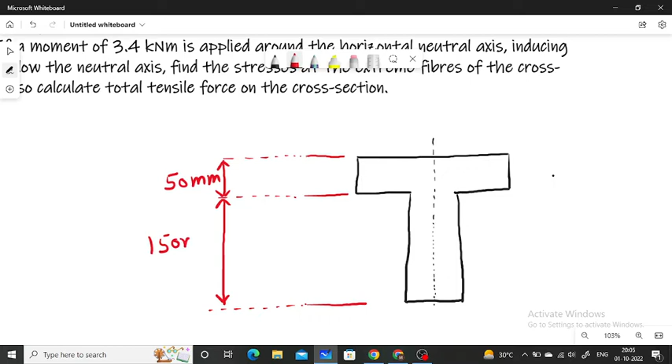The dimension of the plank is 50 mm.

Now come to the problem. Two wooden planks 150 mm and 50 mm each are connected to form a T section of a beam. If a moment of 3.4 kilonewton meter is applied around the horizontal neutral axis, inducing tension below the neutral axis.

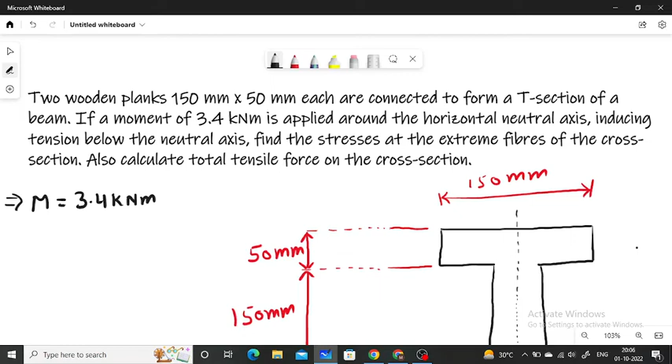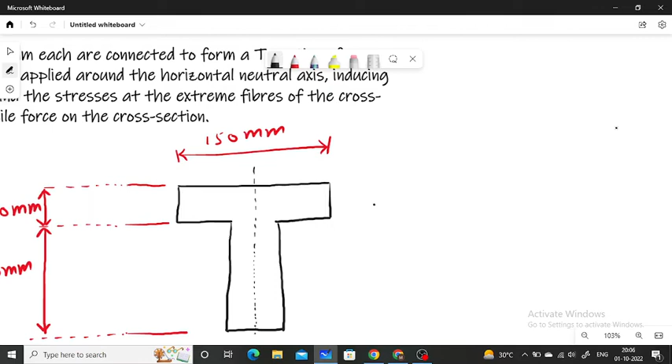यहाँ क्वेश्चन में ये कह रहे हैं कि ये जो बीम है, सपोज ये मेरे पास जो बीम है, इस बीम में न्यूट्रल एक्सिस के नीचे की लेयर्स पर टेंसाइल स्ट्रेसेस हैं, टेंसाइल बेंडिंग स्ट्रेसेस हैं। ओके, ये किस केसेस में टेंसाइल स्ट्रेसेस न्यूट्रल एक्सिस के बिलो अप्लाइड होती है? बिलो द न्यूट्रल एक्सिस टेंसाइल स्ट्रेसेस तभी इंड्यूस्ड होंगे जब बीम में सैगिंग प्रोड्यूस होगी। ओके, सैगिंग लाइक दिस।

The length of the bottom layer will increase only if sagging develops due to the applied bending moment or due to the applied load. So here in this T section, sagging will develop below the neutral axis, and tensile stresses are induced due to the load conditions.

First of all we have to determine the position of the neutral axis. As we discussed in the derivation of the bending moment, the neutral axis passes from the center of gravity, the center of area of the section of the beam. So first of all we have to calculate the center of area of this T section.

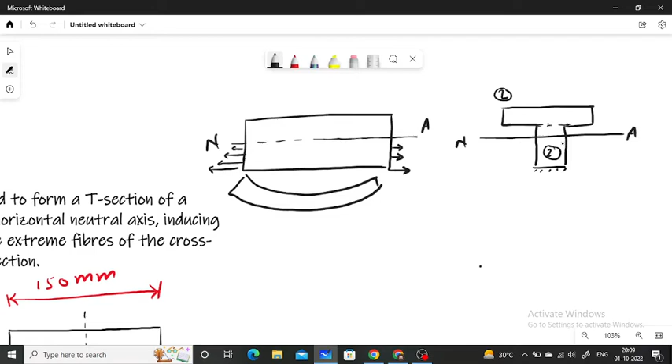Now for finding out the center of area of this cross section, we have to divide this section into two parts. First, a horizontal rectangular section, let's call this section 2, and a vertical rectangular section, let's call this section 1. So first of all we have to calculate the center of area of this cross section.

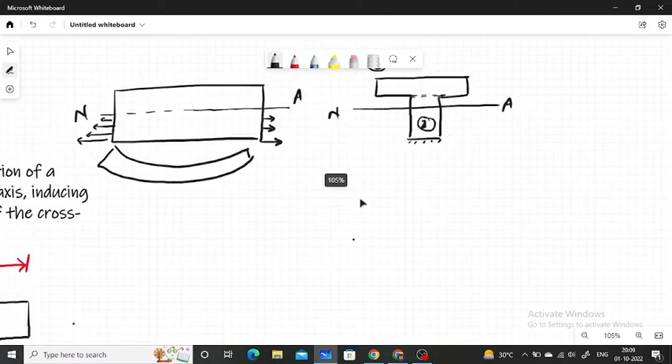As we know, the bending equation for the beam is M upon I equals sigma b upon y, where M is the maximum bending moment of resistance applied on the cross section of the beam, and I is the moment of inertia of the cross section about its neutral axis. For rectangular cross sections, the moment of inertia about its neutral axis is bd cube by 12.

But for this T section, we have to calculate the moment of inertia using the parallel axis theorem. And we know that sigma b is the bending stress developed on a layer which is at a distance y from the neutral axis.

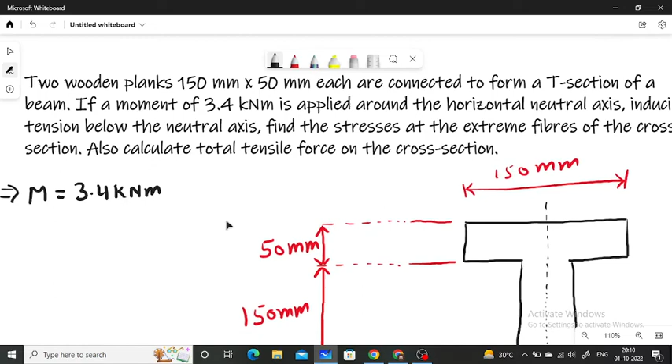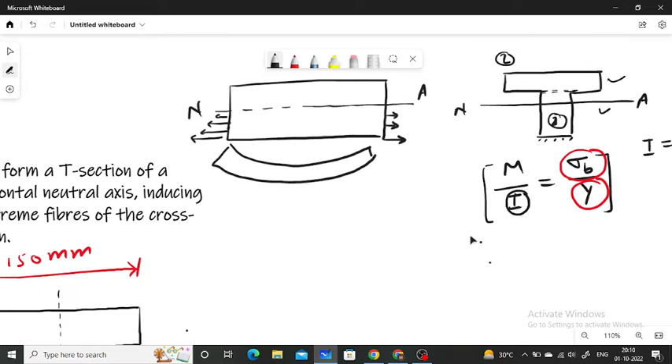Now for determining the bending stresses, the problem says to find the stresses at the extreme fibers of the cross section. So to find the magnitude of stresses at its extreme fibers, we have to calculate the center of area of this cross section, because after finding the position of the neutral axis, we can calculate the distances of the extreme fiber from the neutral axis.

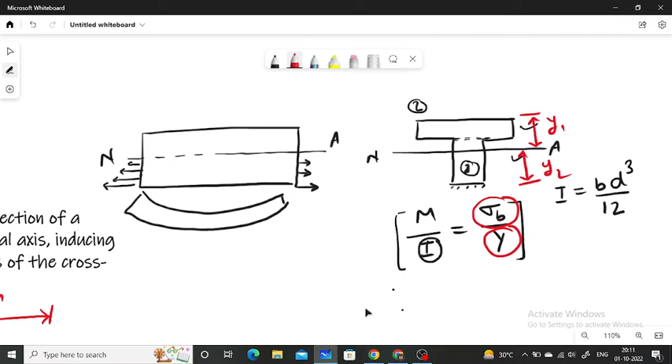Here the neutral axis will not pass through its middle point, so the distances of the upper and bottom extreme fibers from the neutral axis are different. So we have to calculate these distances. First we have to calculate the position of the neutral axis, so that we can determine the distances of the extreme fibers from it, and then calculate the maximum bending stress induced in the section.

Now for calculating the center of area of this T section, we know that this cross section is symmetrical about the y-axis.

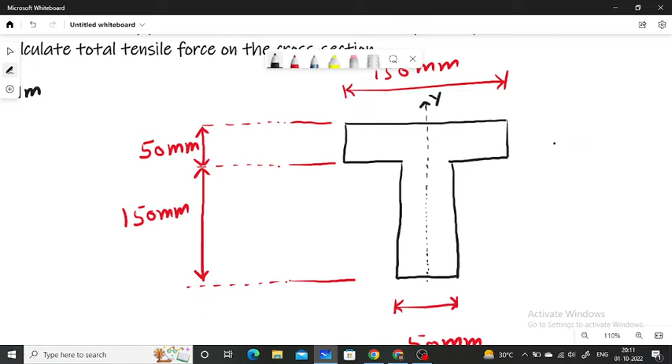If we draw a vertical axis from its center point, then about this axis, the section is symmetrical.

Now draw a horizontal line from its bottom layer, the x-axis. The section is not symmetrical about the x-axis, so we have to calculate the coordinate of y from its origin. Because the section is symmetrical about the y-axis, the coordinate of center of area for x is 0. So for calculating the coordinates of the center of area point, suppose this is x bar comma y bar.

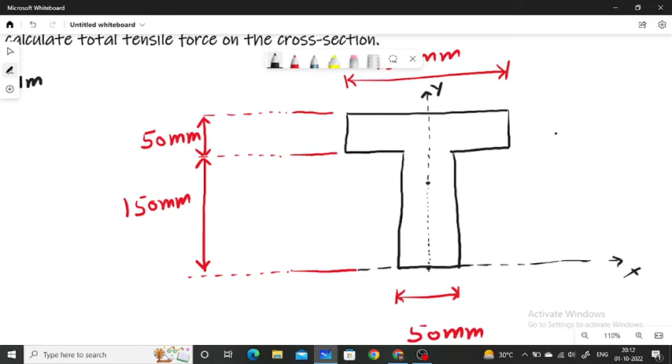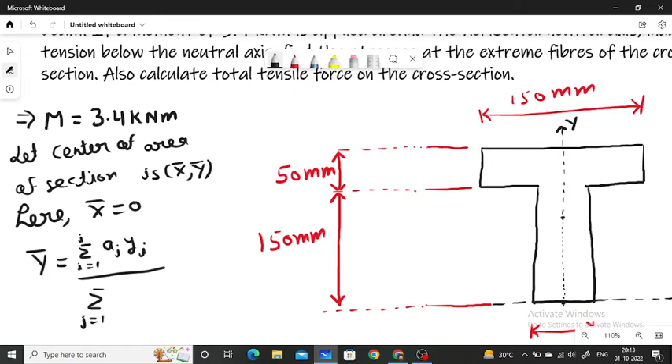Here x is equal to 0, so we have to calculate y bar only. If let the center of area of section is x bar comma y bar, here x bar is equal to 0, and y bar will be equal to the summation i equal to 1 to n of ai yi, upon summation i equal to 1 to n of ai. Clear?

This is section number 2, this is section number 1. This is the y bar.

Center of area of cross section 1 from the origin point is y1, let's say, and center of area of section 2 from the origin is y2.

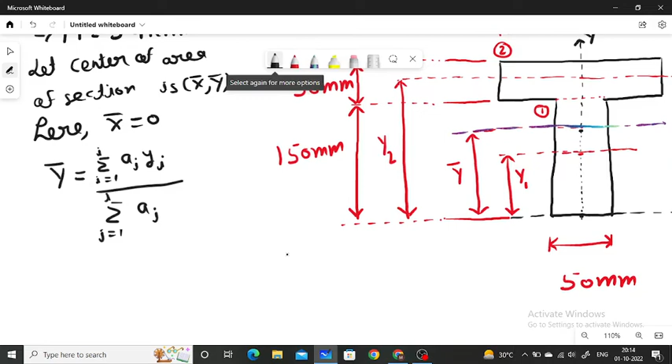Now for determining the center of area, I am calculating the center of area using a table. Section 1, section 2. Area of section 1, denoted by AI, and the unit of this AI is mm square.

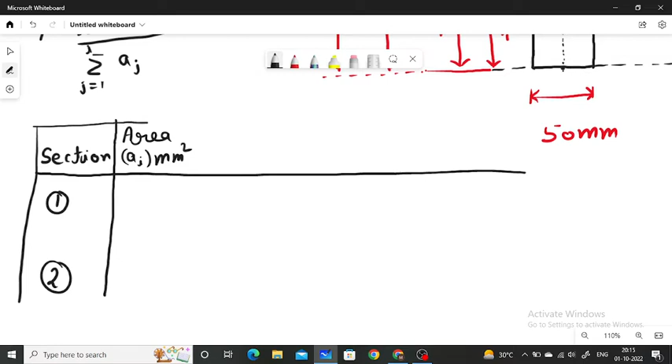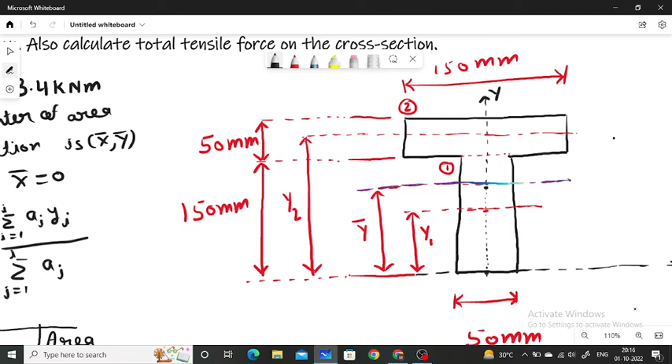Now, what is the dimension of section 1? The width of the section is 50 mm and height of the section is 150 mm. So the area of the section is 7500 mm square.

Dimension of the cross section is 150 into 50, so the area is 7500 mm square, and section 2 also has the dimension of 150 into 50, so the area of section 2 is also 7500 mm square.

Now for calculating y bar, we need the summation of all the cross sections' areas to determine the center of area. So here the area of first section is 7500 and the area of section 2 is also 7500, so the summation of these areas is 15,000 mm square. This is the summation A.

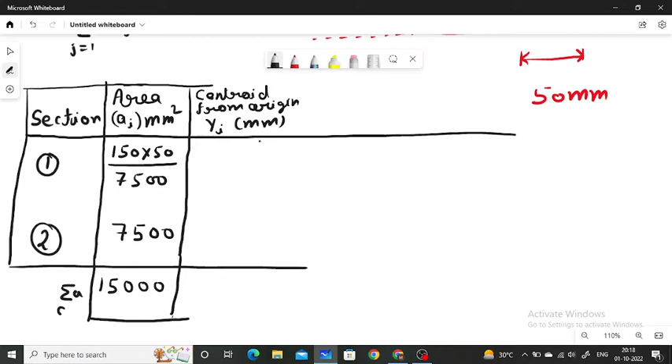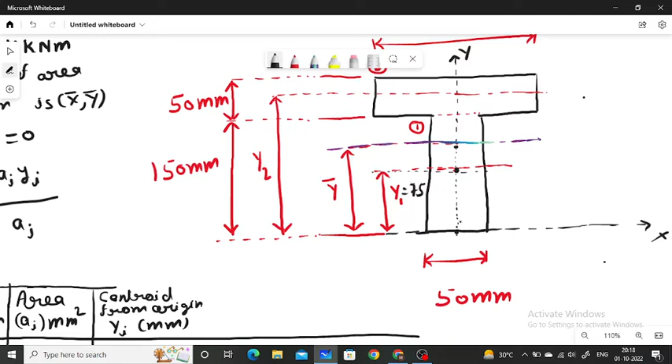So what will be y1? First, the distance of centroid of section 1 from its origin point or bottom layer is y1. This axis passes through the center of this rectangular section 1. So the total vertical distance of section 1 is 150, so the centroid will be at 75 mm, half of the length. So y1 is 75 mm.

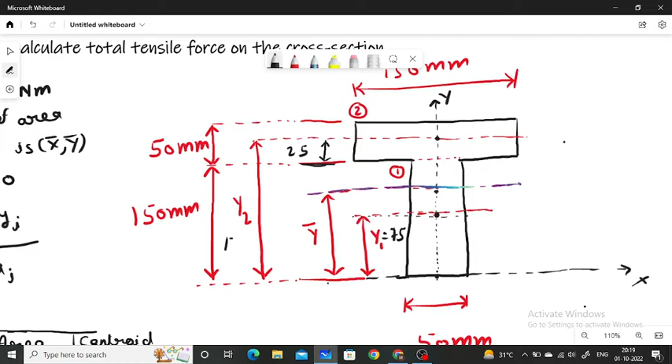y2: the centroid of section 2 will also pass through its center point. The height of the section is 50 mm, so this distance will be half of the height, which is 50 mm, so it's 25 mm. The total distance from the origin point, from the bottom layer, up to section 2 is 150 mm. So total y2 will be equal to 150 plus 25, which is 175 mm.

Multiply ai, area into centroid distance: ai yi. So 75 into 7500 is equal to 5,62,500, and 175 into 7500 will be 13,12,500.

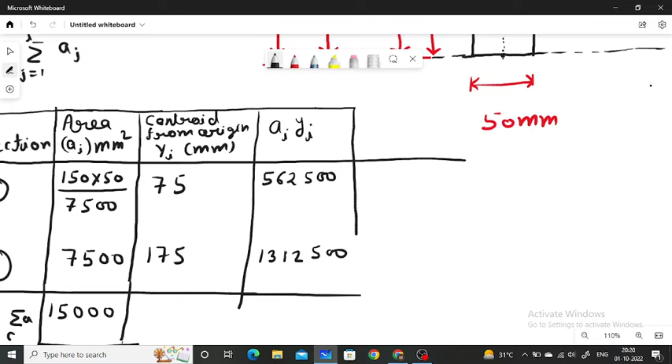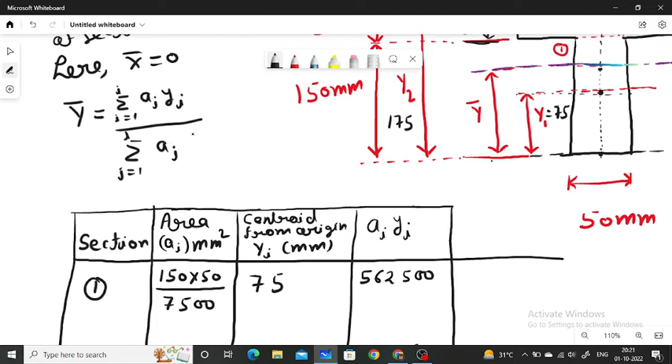Now add these values, because the formula for y bar is summation of ai yi upon summation ai. Summation ai, the sum of area of the sections, is calculated. Now we have to calculate summation of ai yi. Here it will be equal to 1,875,000. This is the summation ai yi.

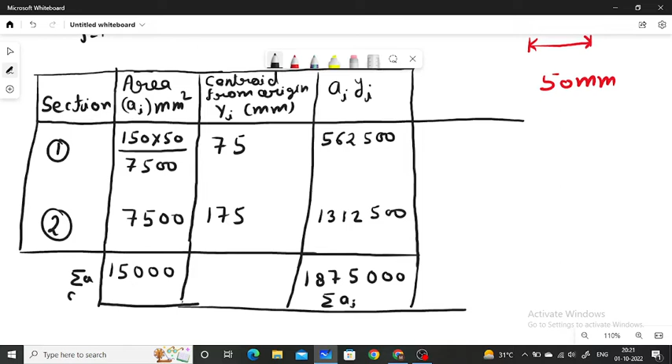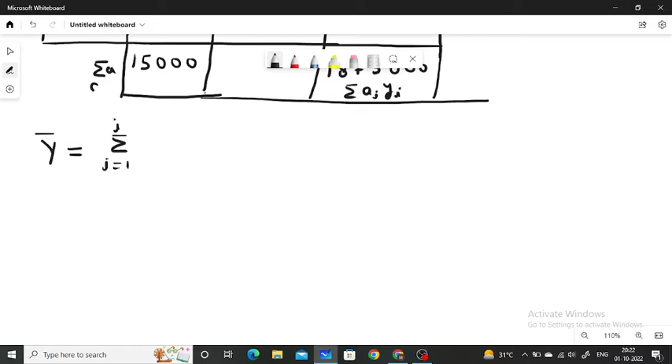Now we can calculate y bar. Y bar will be equal to summation i equal to 1 to n of ai yi, upon summation i equal to 1 to n of ai. Here summation ai yi is 1,875,000 divided by 15,000, so it will be equal to 125 mm.

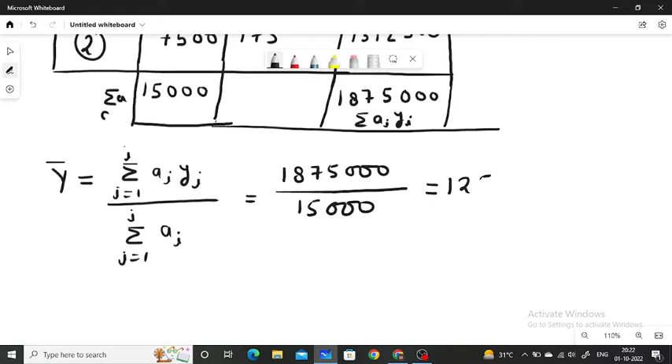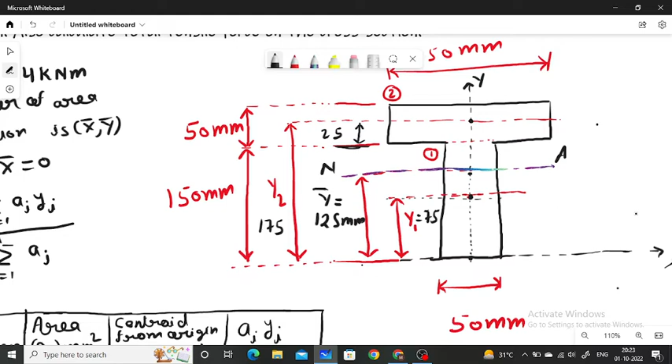So the centroid of this T section is at 125 mm from the bottom layer. The neutral axis passes through this centroid point. Now we have to calculate the moment of inertia of this cross section about its neutral axis.

Now we have to calculate the moment of inertia of section 1 about the neutral axis. Here the neutral axis is at a distance of h1 from the horizontal axis passing through the centroid of section 1. From the parallel axis theorem, we can calculate the moment of inertia of cross section 1 about its neutral axis.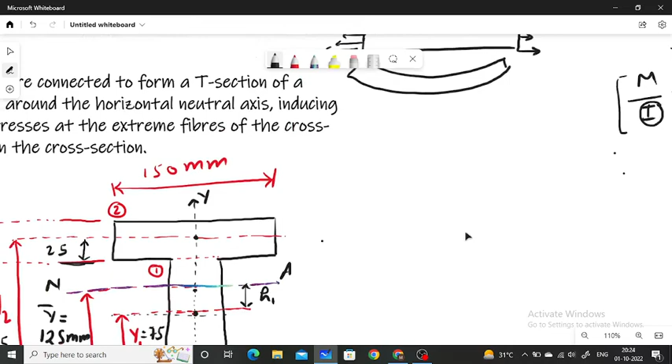Okay, by parallel axis theorem. So what is parallel axis theorem? First we have to understand what is parallel axis theorem.

Suppose we have a rectangular cross section whose width is b and depth is d. From its centroid, a horizontal axis, the moment of inertia of this cross section about a horizontal axis passing from its centroid point is Ixx will be bd cube by 12.

We know that. Now we have to calculate the moment of inertia of this section about an axis which is at a distance of h from the horizontal axis passing from the centroid of this cross section. If the area of the section is A, in that case moment of inertia about this parallel axis will be equal to I is equal to Ixx plus AH square.

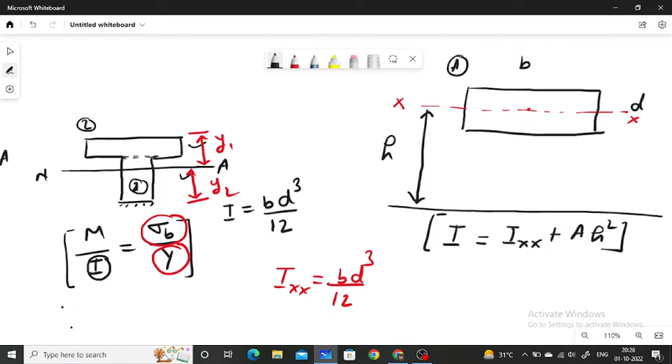So finding out the moment of inertia of section 1 about its neutral axis, which is at a distance of h1 from the horizontal axis passing from the centroid point of section 1, will be equal to Ixx, here we write I1. Moment of inertia of section 1 about its neutral axis passing from its centroid will be I1 plus A1 H1 square.

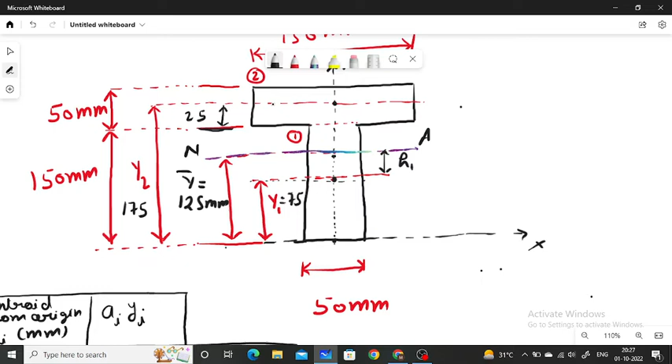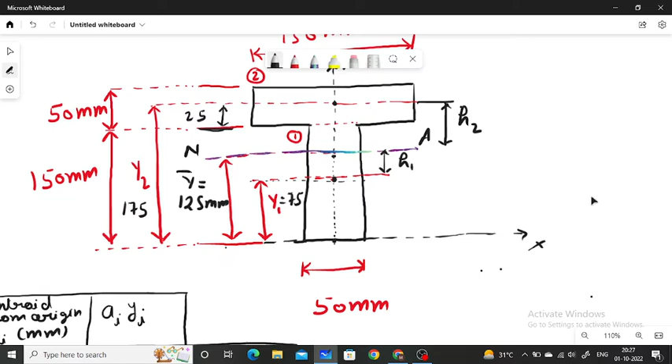Similarly, moment of inertia of section 2 about the neutral axis will be equal to, if the distance of the neutral axis from the axis passing from its centroid point, horizontal axis passing from its centroid point is h2, in that case moment of inertia of section 2 about the neutral axis will be equal to I2 plus A2 H2 square.

Now distance, or we can write moment of inertia of section about axis, or say horizontal axis passing from its centroid.

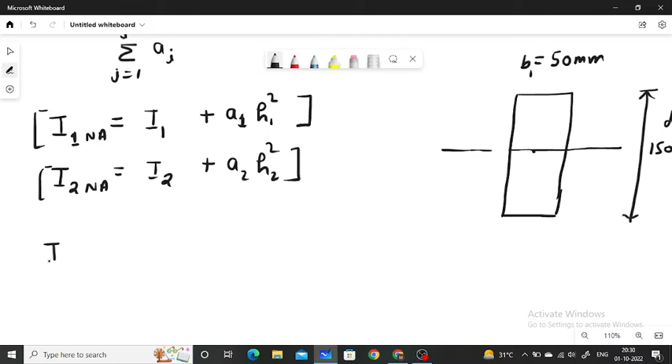Now calculating this value, it is equal to 14062500 mm to the power 4. So for section 1 the moment of inertia will be 14062500. Now calculating the moment of inertia of section 2 about its horizontal axis passing from its centroid point.

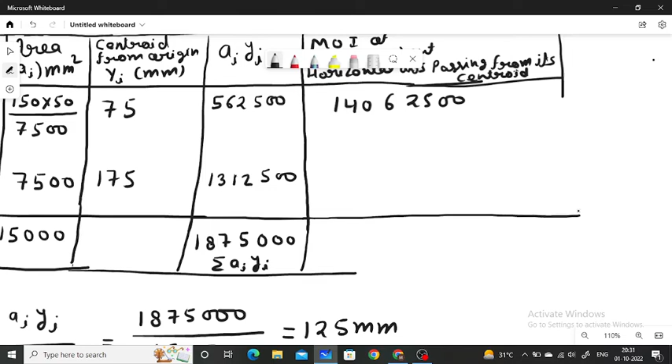So for this section, B2 will be 150 mm and D2 will be 50 mm. Now the moment of inertia about this section, horizontal axis passing from its centroid point, I2 will be equal to B2 D2 to the power 3 by 12. Here B2 is 150, D2 is 50 to the power 3 by 12. Clear? Now calculating this,

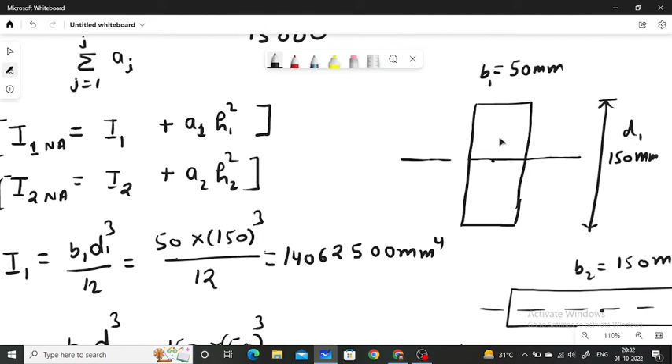It will be equal to 1562500 mm to the power 4. One five six two five double zero.

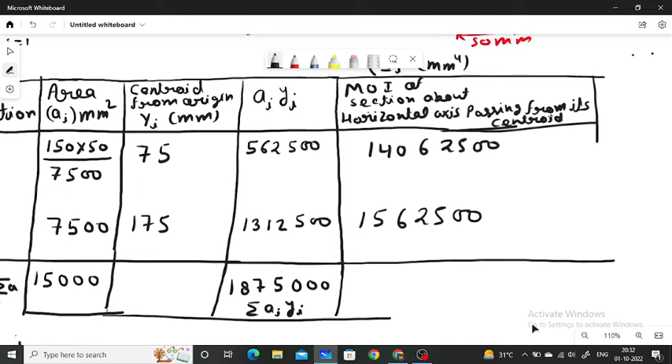Now we have to determine the distance of the neutral axis, the perpendicular distance between the horizontal axis passing from the centroid point of the section and the neutral axis. For determining this, hi will be equal to yi minus y bar. Here y bar is 125 and y1 is 75. The horizontal axis passing from the centroid of section 1 is at a distance of 75 mm from the bottom layer.

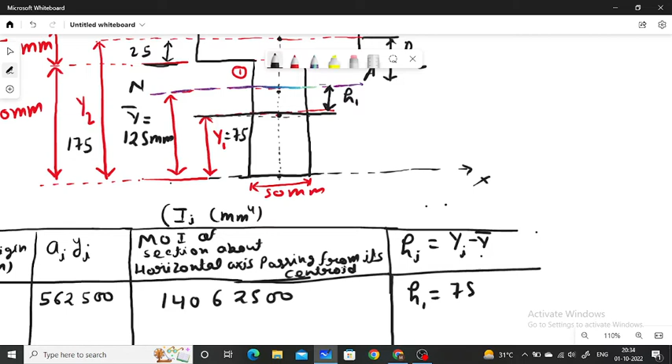And the distance of the neutral axis from the bottom layer of the cross section is 125 mm. So the difference between these distances, the vertical perpendicular distance between these two axes, will be h1 is equal to y1 minus y bar. Here h1 is equal to 75 minus 125 mm, it will be equal to minus 50 mm. The minus sign shows here that the centroid point is below the neutral axis.

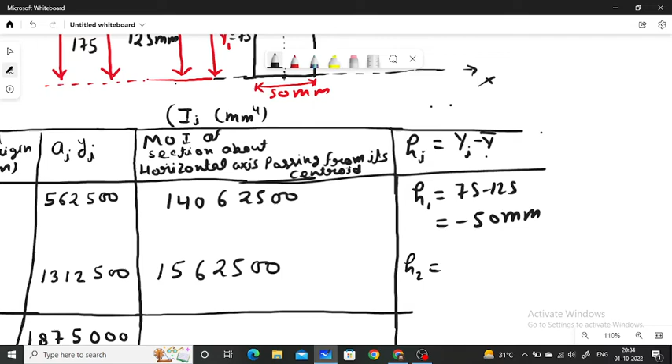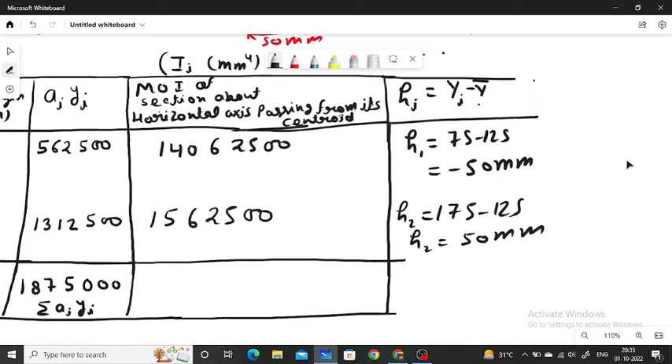Now h2 will be equal to, similarly, total y2 is 175 and y bar is 125. So the difference between the distance of the neutral axis and the horizontal axis passing from its centroid point is 175 minus 125. Here h2 will be 50 mm. Now for calculating the moment of inertia of the section about its neutral axis, we have to calculate AI HI square.

The area of section 1 is 7500 mm square, and the distance from the neutral axis h1 is 50 mm. Calculating this, it will be equal to 18,750,000.

Similarly, the area and the distance from the neutral axis of the horizontal axis passing through the centroid of the section is the same, so A2 H2 square is equal to the same value.

Now for calculating the moment of inertia of the section about its neutral axis, it will be equal to I1NA plus I2NA. As we know, I1NA is equal to I1 plus A1 H1 square, plus I2 plus A2 H2 square, or say I1 plus I2 plus A1 H1 square plus A2 H2 square.

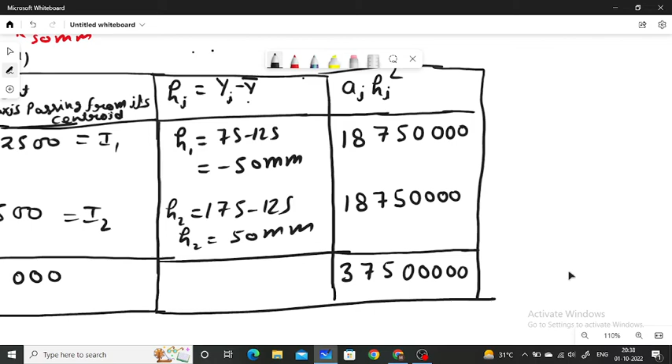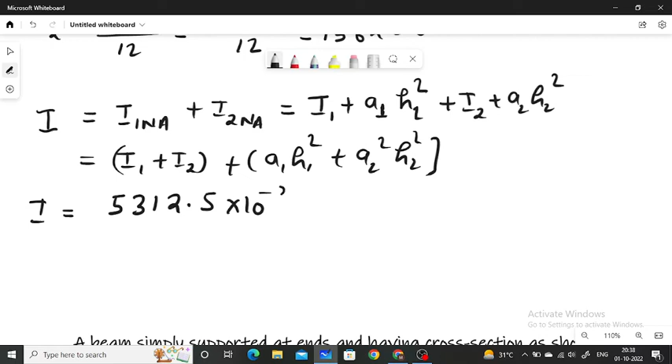For determining the value of I, the moment of inertia will be equal to 5312.5 into 10 to the power minus 8 meter to the power 4.

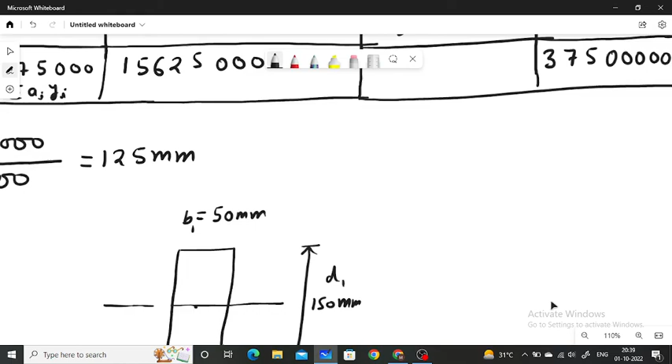Now we have to calculate the stresses about the extreme fibers. Here, the distance of extreme fibers from the neutral axis is y1 and y2. Here y1 is equal to 125 mm.

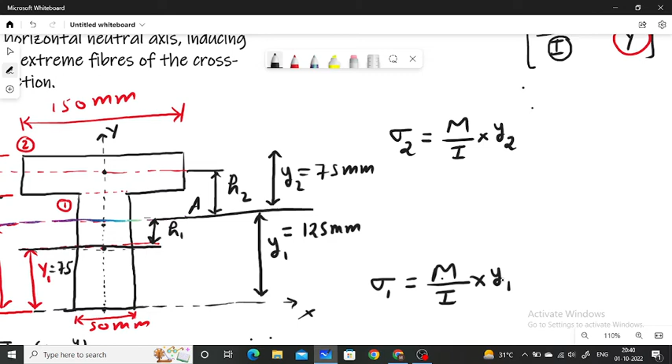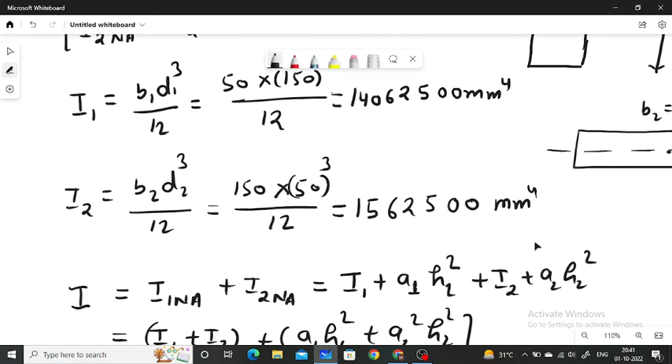As we know that the bending moment is 3.4 kilonewton meter, so m upon I into y1: here m is 3.4 kilonewton meter divided by I which is 5312.5 into 10 to the power minus 8, into y1 which is 125 mm multiplied by 10 to the power minus 3.

Now the bending stress at the bottom extreme fiber will be equal to 8 into 10 to the power 6 Newton per meter square, or say 8 mega Newton per meter square, tensile, as mentioned in the problem also.

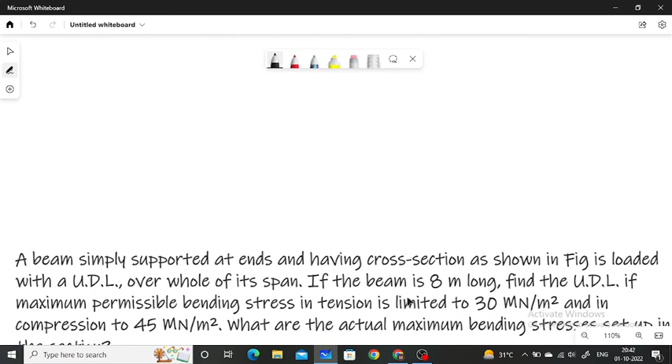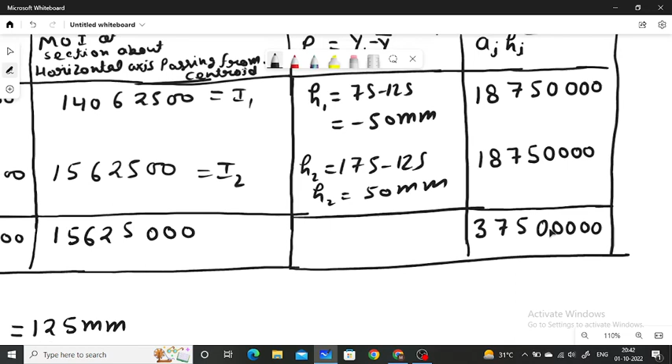And the stress at the extreme top layer will be equal to sigma 2, which is m upon I into y2. Here m upon I is 3.4 into 10 to the power 3 divided by I which is 5312.5 into 10 to the power minus 8, into y2, which is 75 mm, multiplied by 75 into 10 to the power minus 3.

Calculating this value: 3.4 into 10 to the power 3 multiplied by 75 into 10 to the power minus 3, divided by 5312.5 into 10 to the power minus 8. The bending stress will be equal to 4.8 into 10 to the power 6 Newton per meter square, or say 4.8 mega Newton per meter square.

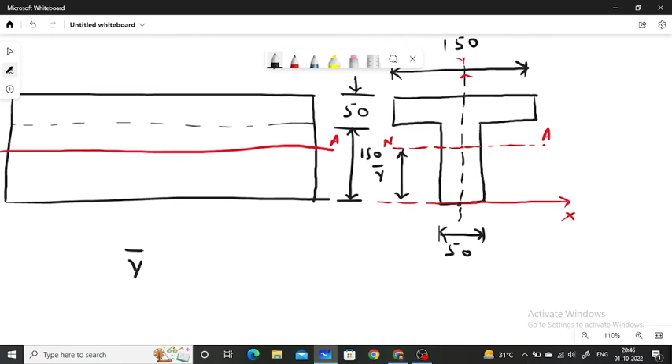तो हमने इस सेक्शन को दो सेक्शंस में डिवाइड कर लिया। फर्स्ट रेक्टेंगुलर सेक्शन जो वर्टिकल है, और सेकंड सेक्शन जो हॉरिजॉन्टल है। दोनों के एरियाज फाइंड आउट कर लिए यहाँ पर 150 इंटू 50 एंड 150 इंटू 50।

y1 वो पॉइंट है फर्स्ट सेक्शन का सेंट्रॉइड पॉइंट फ्रॉम दी बॉटम लेयर। जब भी हम किसी भी सेक्शन का सेंट्रॉइड फाइंड आउट करते हैं, तो ये जो ओरिजिन पॉइंट होता है, रेफरेंस पॉइंट होता है, वो हमारा फिक्स होता है, ये बात पहले से पता होती है। तो जिस ओरिजिन पॉइंट से हम y बार डिटरमाइन कर रहे हैं, उसी ओरिजिन पॉइंट से सेक्शन 1 का सेंट्रॉइड पॉइंट हमने डिटरमाइन किया। और ये सेक्शन 1 का सेंट्रॉइड पॉइंट कहाँ पर होगा?

उसके विड्थ के हाफ पर, उसके डेप्थ के हाफ पर। यहाँ इसकी हाइट दी हुई है 150, तो इसका हाफ करेंगे तो 75 mm, तो 75 mm पर होगा y1। सिमिलरली सेक्शन 2 के सेंट्रॉइड पॉइंट की बात करें, तो इस सेक्शन की हाइट 50 mm थी, तो 25 mm, मतलब हाफ सेक्शन पर। और टोटल इसके बॉटम लेयर, सेकेंड सेक्शन का बॉटम लेयर टोटल सेक्शन के बॉटम लेयर से 150 mm डिस्टेंस पर है। तो 150 प्लस 25, 175।

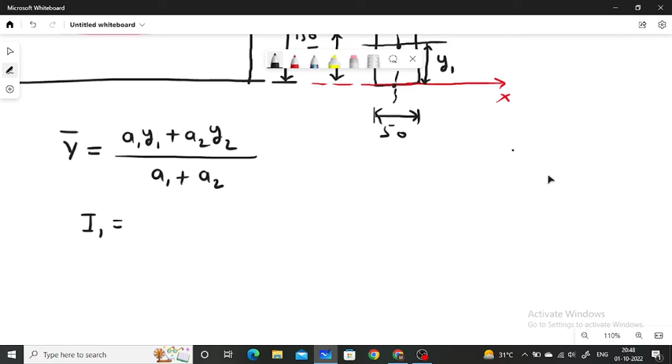सबसे पहले हमने सेक्शन 1 का मोमेंट ऑफ इनर्शिया निकाला उस सेक्शन से पास होने वाली हॉरिजॉन्टल एक्सिस के अबाउट, जो उसके सेंट्रॉइड पॉइंट से पास हो रही थी। तो यहाँ B1 और D1 की वैल्यूज को हमने उसके अकॉर्डिंग देखा। B1 पैरेलल डायमेंशन 50 mm थी, तो 50 इंटू 150 टू द पावर 3 बाई 12 mm टू द पावर 4। सिमिलरली I2 सेक्शन 2 का

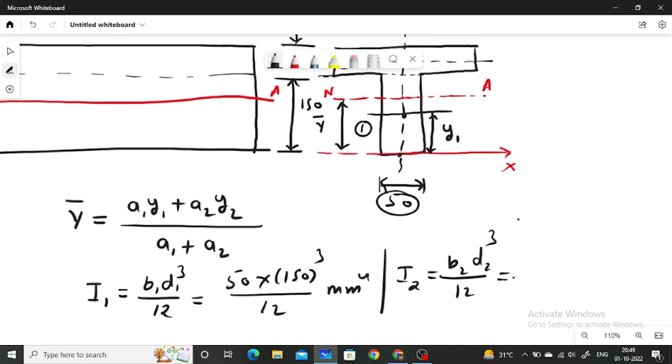हॉरिजॉन्टल एक्सिस के अबाउट हमने मोमेंट ऑफ इनर्शिया फाइंड आउट किया, जो कि उसके सेंट्रॉइड से पास हो रहा था। यहाँ B2, D2 टू द पावर, B2 यहाँ हो गया 150 क्योंकि एक्सिस के पैरेलल डायमेंशन 150 mm था। और परपेंडिकुलर डायमेंशन 50 mm है, तो 150 इंटू 50 टू द पावर 3 बाई 12।

और यहाँ से I1, I2 डिटरमाइन कर लिया। पैरेलल एक्सिस थ्योरम के अकॉर्डिंग अगर हमें मोमेंट ऑफ इनर्शिया चाहिए अबाउट इट्स न्यूट्रल एक्सिस, दैट विल बी इक्वल टू I1 प्लस A1 H1 स्क्वायर। एंड फॉर सेकंड सेक्शन, मोमेंट ऑफ इनर्शिया अबाउट इट्स न्यूट्रल एक्सिस I2x इज इक्वल टू I2 प्लस A2 H2 स्क्वायर।

क्लियर? I1, I2 has been calculated by us. A1, A2 is also calculated by us. Now H1, H2 can be calculated by the formula HI is equal to yi minus y bar. And final moment of inertia of the cross section about its neutral axis will be I1x plus I2x.

यहाँ से जैसे ही हमने डिटरमाइन किया, उसके बाद बेंडिंग इक्वेशन हम यूज कर सकते थे। बेंडिंग इक्वेशन यूज की, सिग्मा b इज इक्वल टू M अपॉन I इंटू y। I हैज बीन कैलकुलेटेड बाई अस। तो इस तरह के प्रॉब्लम्स में सबसे बड़ी प्रॉब्लम सिर्फ मोमेंट ऑफ इनर्शिया डिटरमाइन करने का है।

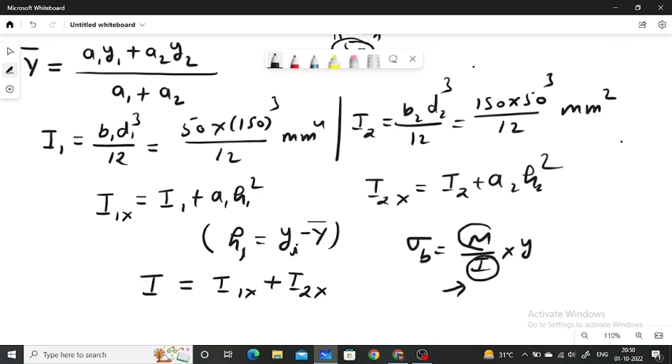बैंडिंग मोमेंट आपको या तो वैल्यू दे दी जाएगी, और एक्सट्रीम केसेस में इसको आपको कैलकुलेट करना होता है अकॉर्डिंग टू दी बीम एंड दी लोड कंडीशंस। यहाँ अगर स्ट्रेस डिस्ट्रीब्यूशन कर्व इस सेक्शन का अगर हम बनाएं, तो वो कुछ इस तरह से अब बना सकते हैं हम।

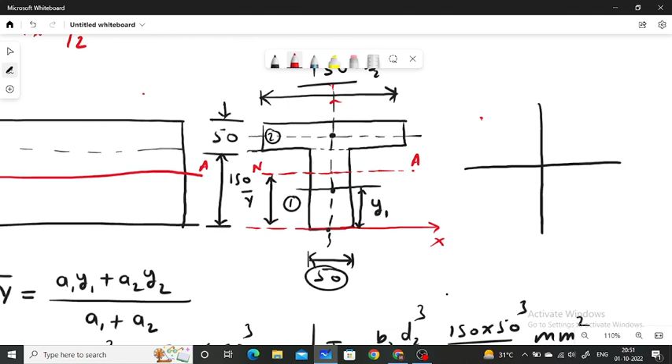एक्सट्रीम फाइबर जो कंप्रेसिव स्ट्रेस आ रही है वो 4.8 आ रही है टॉप लेयर पर। तो इस एक्सिस के अबाउट अगर हम लेफ्ट साइड में माइनस में जाएंगे तो यहाँ हम कंप्रेसिव स्ट्रेसेस को दिखाते हैं, और इस एक्सिस के अबाउट राइट में जाएंगे तो हम टेंसाइल स्ट्रेसेस को दिखाते हैं। तो यहाँ स्केल से एज्यूम करते हुए हम इसे बनाएंगे, और मिडिल से नहीं पास हो रहा है ये।

चलिए कोई नहीं। और बॉटम लेयर पर जो स्ट्रेस का मैग्नीट्यूड है वो है 8 मेगा न्यूटन पर मीटर स्क्वायर। तो यहाँ कुछ अप्रॉक्स 4.8 सेंटीमीटर की लाइन ड्रॉ कर दो आप, यहाँ से शो करने के लिए 8 या हाफ कर लीजिए स्केलिंग करके, और इन दोनों पॉइंट्स को एक स्ट्रेट लाइन से मिला दीजिए।

क्यों मिला रहे हैं, यहाँ देखिए बेंडिंग स्ट्रेस एम अपॉन आई, बेंडिंग मोमेंट और आई कांस्टेंट इज प्रोपोर्शनल टू दी वाई। तो जो लाइन ड्रॉ होगी, ये y है, y एक्सिस पे हम लेयर्स की डिस्टेंसेस बता रहे हैं, ये न्यूट्रल एक्सिस हो गया, न्यूट्रल एक्सिस से y डिस्टेंस पर कितनी स्ट्रेसेस हैं। तो स्ट्रेसेस का मैग्नीट्यूड वैरी करेगा एक लाइन के अलोंग, क्योंकि ये एक लीनियर इक्वेशन है, याद रहेगा। ये आ गया स्ट्रेस डिस्ट्रीब्यूशन कर्व।